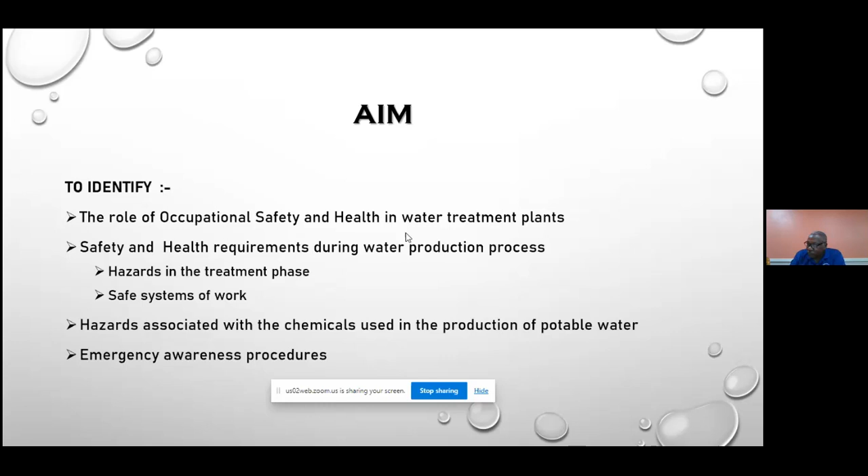The aim of today's discussion is to identify the following: the role of occupational safety and health in water treatment plants, health and safety in the production of potable water, and in that we'll deal with the hazards in the treatment and some safe systems of work, chemicals in the production of potable water, and emergency awareness procedures. The objective is for all of us to understand the importance of safety in the water treatment and how it can impact on us and the people around us.

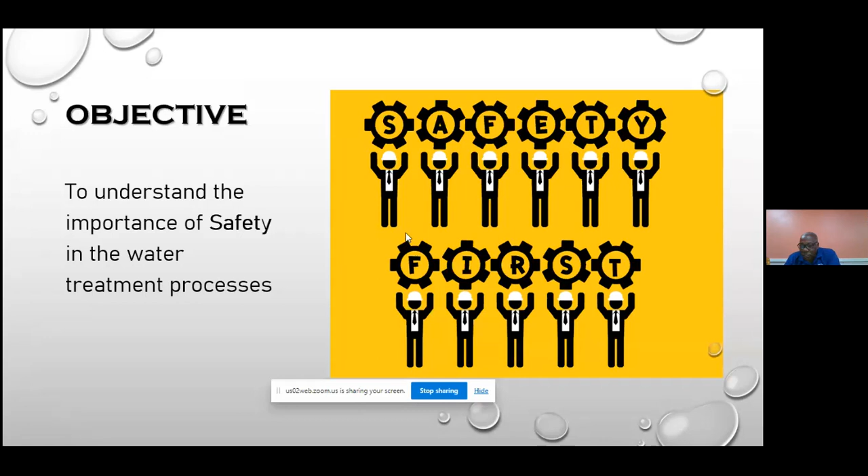Let me do some general introduction. Let me say something about myself. I am Junior Frank. I am Tobagonian by birth, Trinidadian by boat. That makes me a Trinbagonian. I've been employed in the water industry for the last 40 years and in the health and safety department for about 20 of those years. The last 10 years I've been in the management of the health and safety department at the Water and Sewerage Authority in Trinidad and Tobago. Presently, I operate as the manager of health and safety. I may look good to you, and young to you, but I've torn plenty calendars.

So let's get right into the meat of this afternoon's business. Occupational health and safety in the workplace. What is occupational health and safety in the workplace? It is described as a multidisciplinary field concerned with the safety, health, and welfare of people at work. It saves lives and it reduces expenditure from accidents and incidents and other things that may happen from unsafe acts in the workplace. The main purpose of workplace safety is to protect workers from the various hazards that are present in performing one's daily tasks and operations.

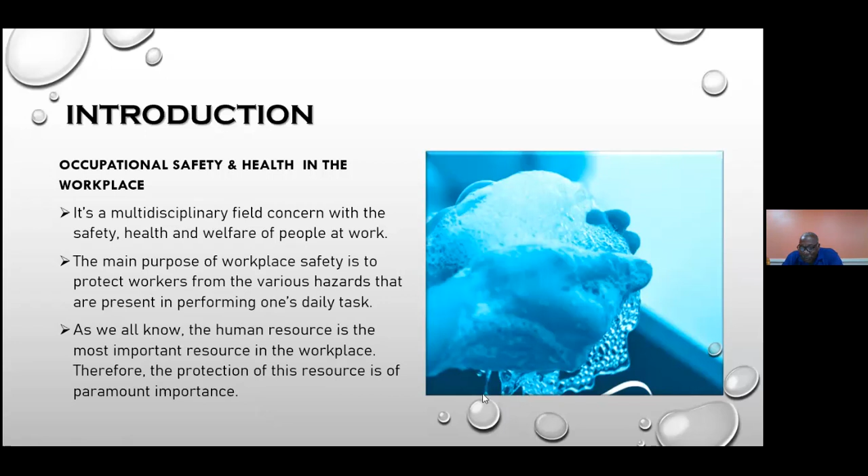I want to talk a little about the COVID-19 pandemic. COVID-19 is real. It's a real dangerous situation. I could talk about Trinidad and Tobago. The numbers were extremely high today of new cases and I think deaths. So it is important that we protect ourselves at all times.

Social distancing, wearing of face covering, washing and cleaning of our hands and the other protocols that comes with COVID-19. Water for ablutionary purposes, such as washing of hands, cleaning, sanitizing, etc., are essential part in preventing and protecting human health during this current COVID-19 pandemic.

Therefore, it's extremely important to have a continuous supply of potable water available for proper hygiene, as this serves as a barrier to human transmission of this COVID-19 pandemic.

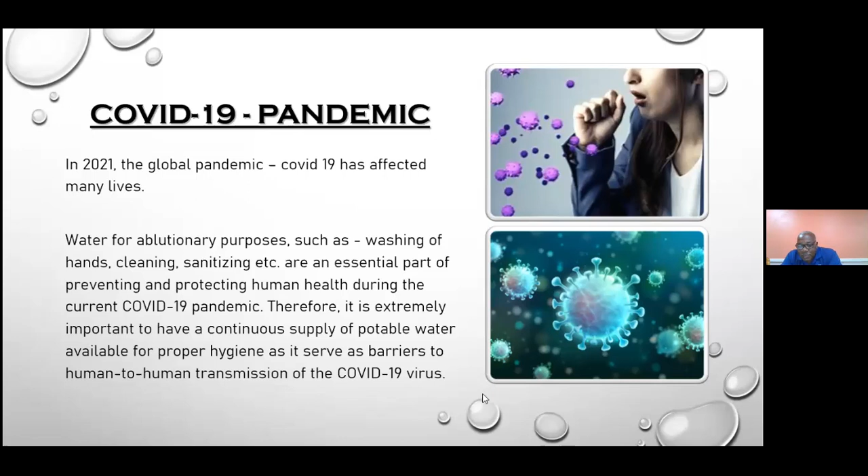I will switch now to the role of occupational health and safety in the workplace. Occupational health and safety in the workplace is basically a three-prong approach. It's legal, it's moral, and financial.

Financial: the causes of accidents and injury in the workplace are extremely expensive. Being the manager of health and safety, I review lots of workplace accidents, and they are very, very expensive. When we look at our workplace accidents, we really don't get the total cost of them. I've seen accidents that appear fairly simple and minor cost millions of dollars. In safety, we say it's not what it would cost us in the beginning, but what will be the final savings when we have proper health and safety procedures in the workplace.

The moral part of occupational health and safety is the expectation of good standards of health and safety. When you come to work, you're expected to work in a safe environment, free from harm and risk, so that you will avoid injury in the workplace. We need you to come back to work tomorrow. And if you are injured and cannot come back, it's costly to replace you. There's no cost in replacing a life. So it's important that the moral aspect of health and safety be taken seriously.

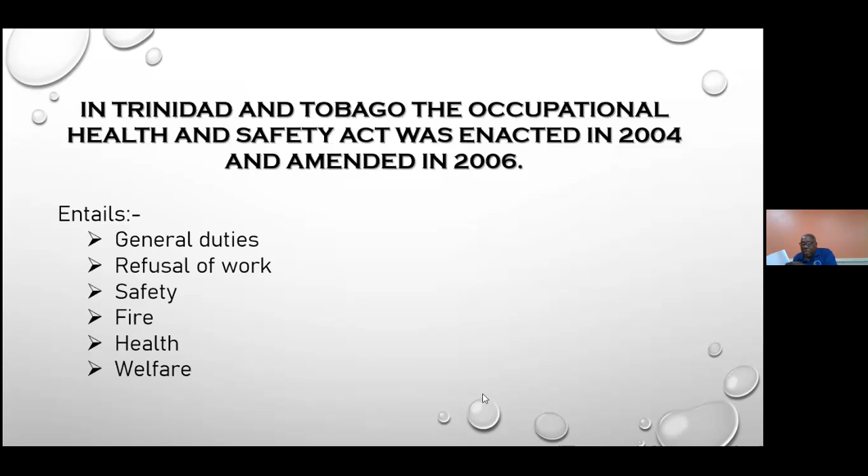We'll go into a little more detail about these parts. The general duties: each employer has general duties, and part of those general duties is ensuring the health, safety, and welfare of all employees at work. The employer must provide a good plan, and provide and maintain safe plant and safe systems of work that are reasonable and practical for safe work without risk to health.

It's also the duty to obtain and or prepare unexpired, prescribed safety data sheets to deal with all the hazardous chemicals present at the workplace. The employer is also duty bound to determine the risk in the workplace and come up with a risk assessment so that employees would be working in a safer environment.

Safety: the employer is duty bound to provide protective clothing and devices of an approved standard with instructions. The employer cannot just give you a new piece of equipment to work with; he's supposed to provide the training and instruction so that you work safely. Ensure adequate ventilation by natural or artificial means, the removal of dust and other impurities, and have safe systems for confined space entry.

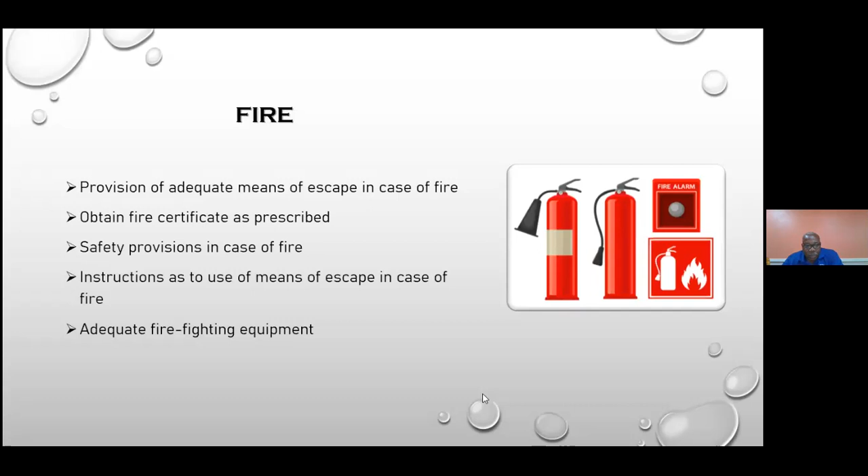Under the section that deals with fire, the employer is duty bound to provide adequate means of escape from a fire. So your emergency escape must be of good standing, must obtain a fire certificate from the prescribed authority, instruction as to the use and maintenance of means for escaping fire, and adequate firefighting equipment in the workplace, be it a fire extinguisher or a hose reel. It must be up to date and the employees must be able to use it.

Another section that deals with health in the Act talks about cleanliness, the need for respiratory protection, adequate lighting, and the prevention of glare.

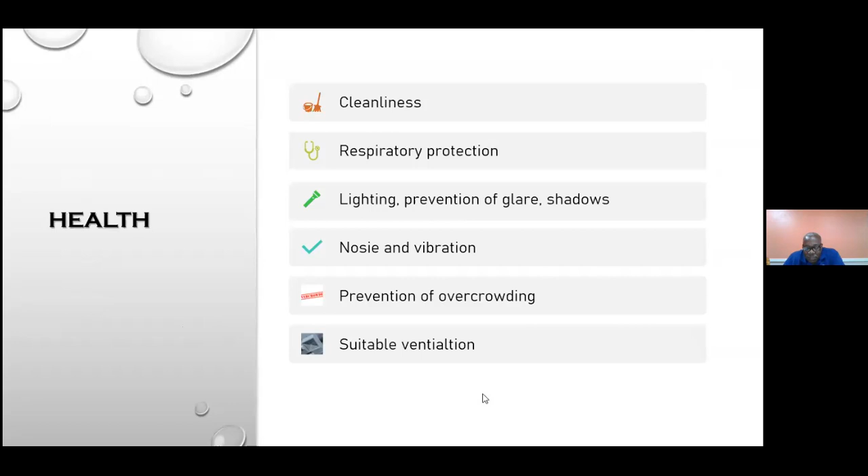Noise and vibration must be not an issue. There mustn't be overcrowding in the workplace. The Act says that each employee should have 11.5 cubic meters of space and also suitable ventilation.

Welfare: the employer is supposed to provide welfare, first aid kits, first aid boxes or cupboard under the control of a trained first aider. It also says every factory shall make effective arrangements to provide and maintain suitable points conveniently situated for all persons employed to have a cool supply of drinking water. We must provide proper drinking water, a cool supply, not necessarily a cold supply. There must also be proper places for washing, urinals and other sources, and they must not be contaminated.

I've also talked about the fines and penalties. Fine range is up to $100,000, and the imprisonment could be up to 3 years. The Act says where there's no specific penalty, it could be provided up to $20,000. Talking about the range of fines, a prominent union leader was charged recently for deploying a fire alarm system when there was no fire in the workplace.

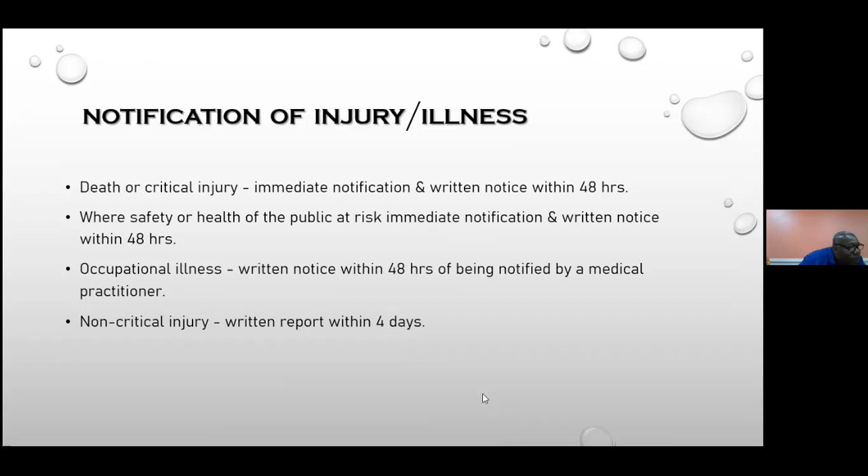To know about the safety for water treatment, we must know about the process of water treatment and how we interact with the process. It is said that the core function of a water treatment plant is to provide potable water. And as we know, potable water is water that has been treated to an international standard that is fit for human consumption.

Basically, we will look at the WHO standards. Also, water must be palatable, aesthetically pleasing to be acceptable for drinking. You wouldn't want to see some discolored water and have a drink of it. So the water must have no color - water is colorless.

Water treatment is the process involving different types of operations: physical, chemical, physicochemical, and biological. The aim is to eliminate and/or reduce contamination or non-desirable characteristics in the water.

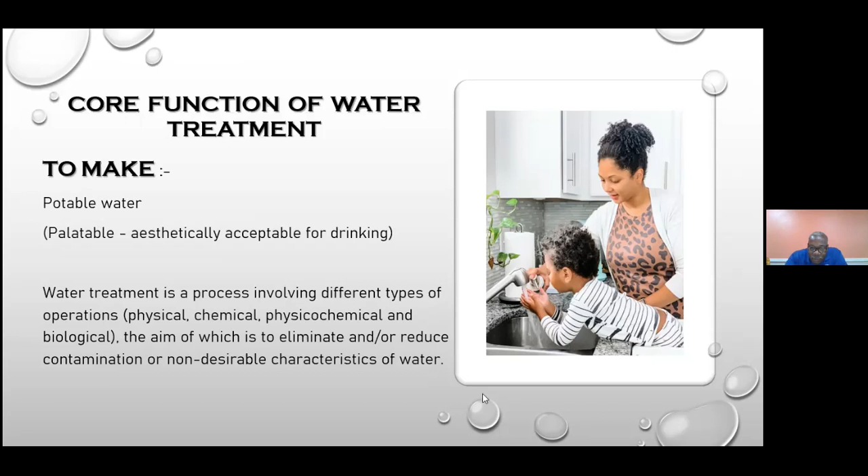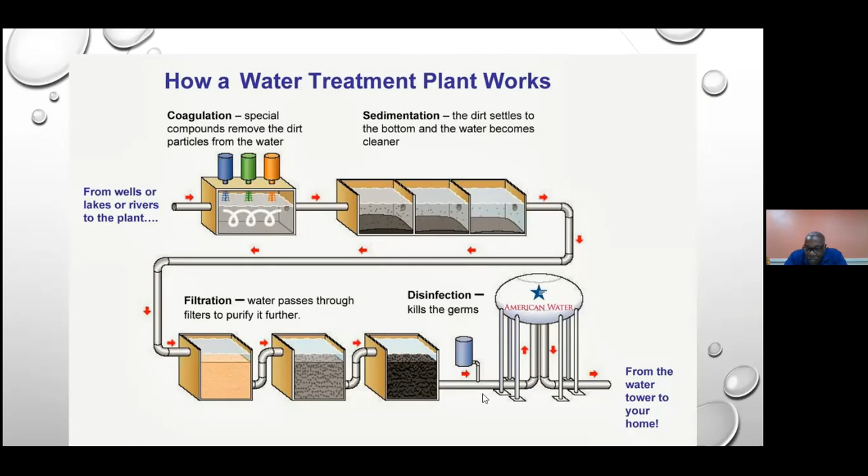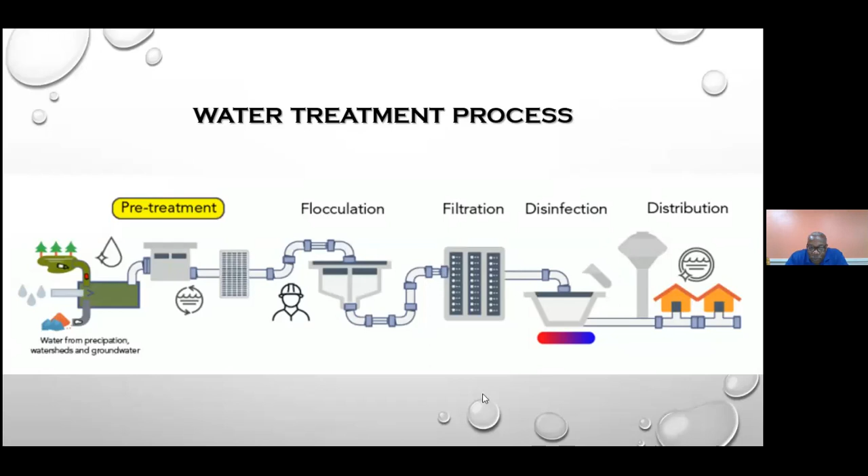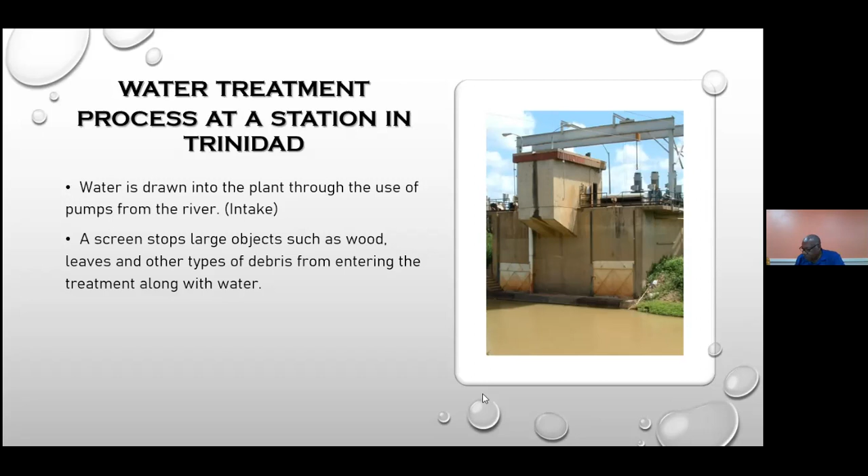Now we're going to discuss some of the treatment process at one of the stations in Trinidad. Water is drawn into the plant through the use of pumps from the river as the intake. Screens stop large objects such as wood, leaves, and other types of debris from entering into the treatment process. As you can see, these are some of the screens that stop the debris from entering into the treatment process.

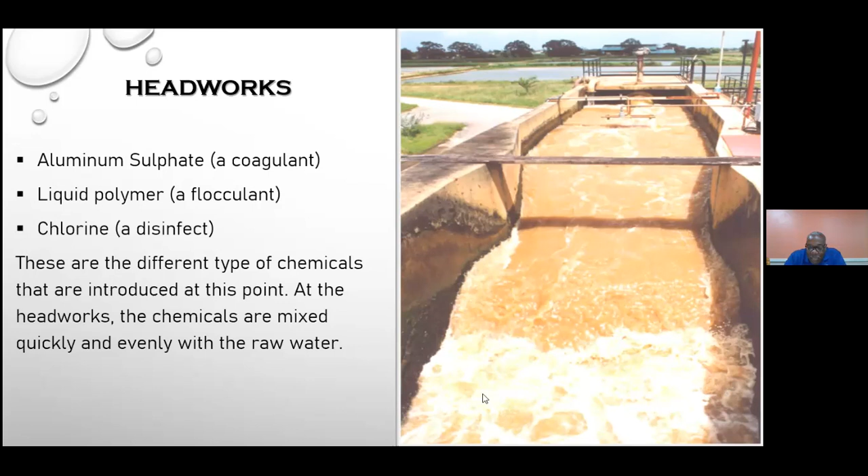Then in the water, the next step is aluminum sulfate, polymer, and chlorine. Different types of chemicals are added to the water at what we call the headworks. These chemicals, when introduced at this point, are mixed quickly and evenly with the raw water.

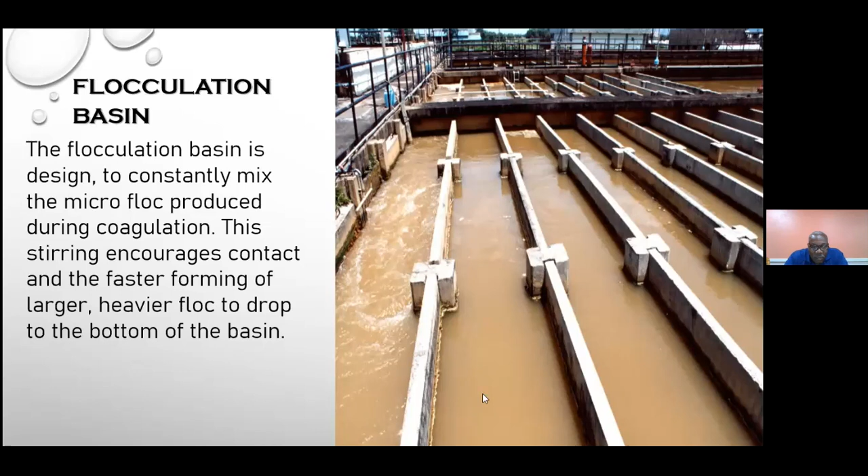Then the water goes to the flocculation basin. At this part of the plant, it is designed to mix the chemicals with the water, producing floc. The cleaner or clearer water is sent to the next stage, and the heavier floc drops to the bottom of the basin. The next stage is sedimentation, where solids are removed from the water by gravity settling. The thick floc settles to the bottom of the basin, where it is referred to as sludge. This sludge is channeled to the sludge lagoon, where it is settled further.

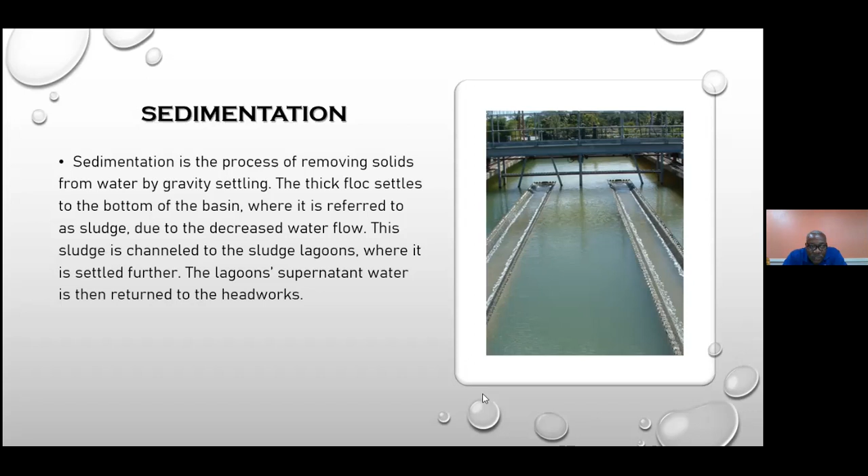The waste from the lagoon is returned to the headworks, so much of the water is not really wasted, of the raw water. Then there's the filtration process.

After the sedimentation, the water is filtered from the sedimentation basin. This helps remove any fine or suspended matter, as well as any floc carryover that remains after the coagulation and sedimentation process.

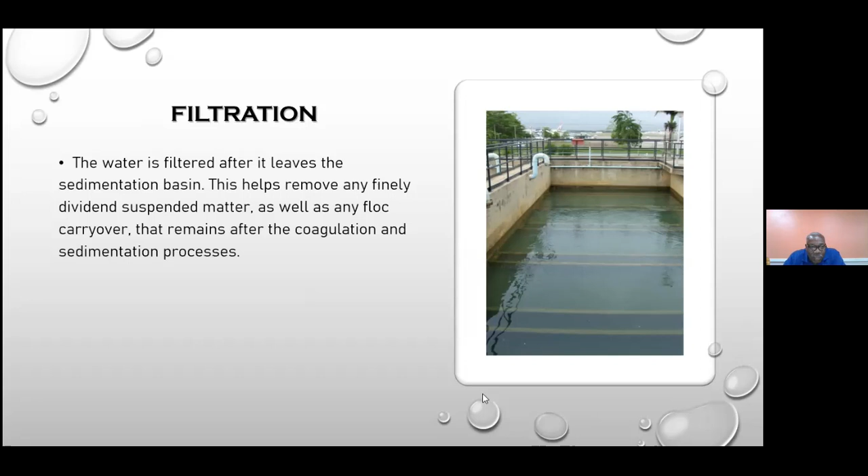The final stage is basically disinfection, where chlorine is applied to the water to kill any bacteria or viruses. Generally, gaseous chlorine is applied at between 2.5 to about 5 parts per million.

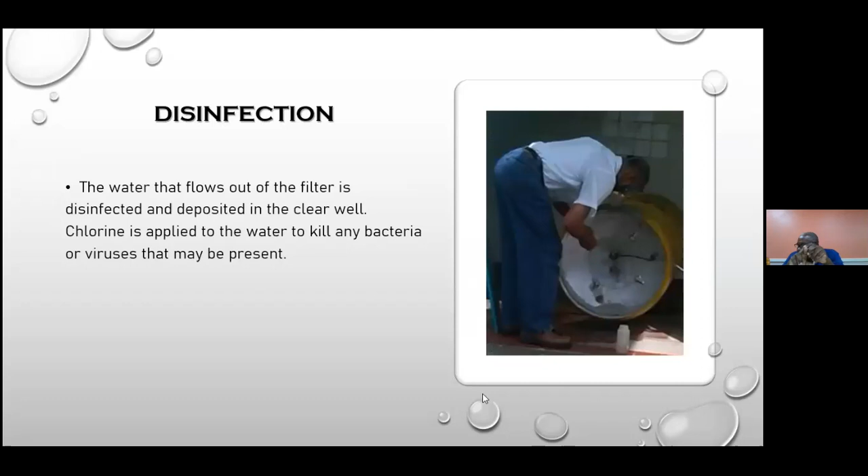We'll discuss some of the workplace chemicals used in the treatment of water. We have chlorine, which could be gaseous, liquid, or granular. There's aluminum sulfate, which we generally call alum. There is lime, carbon, polymer, and a whole range of different chemicals based on the treatment process.

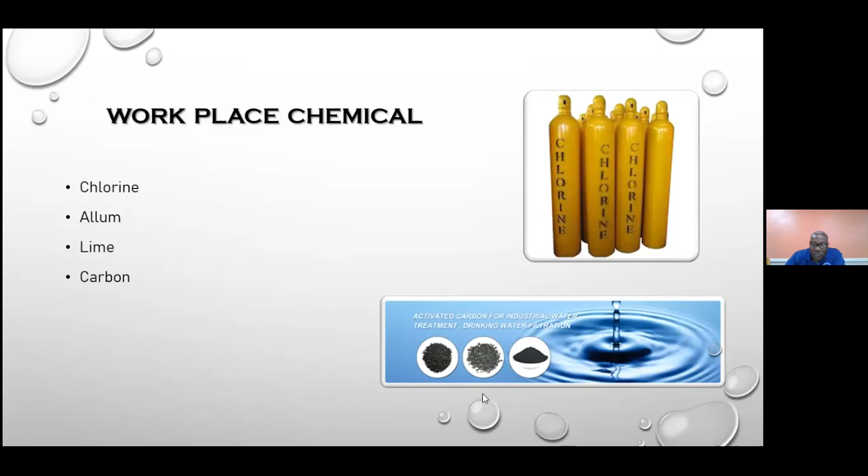To effectively and safely deal with chemicals, we must know what we are doing. There's a document called the SDS or MSDS, the Safety Data Sheet or Material Safety Data Sheet. This is a document that lists information relating to occupational safety and health for the use of chemical substances and products.

The safety data sheets are widely used systems for classification of information on chemical compounds and chemical mixtures. The SDS information will include instructions for the safe use and potential hazards associated with a particular material or product, along with spill handling procedures. A safety data sheet for a substance is not primarily intended for general consumers, but focuses instead on the hazards of working with the material in an occupational setting.

There's also a duty to properly label substances found in the workplace.

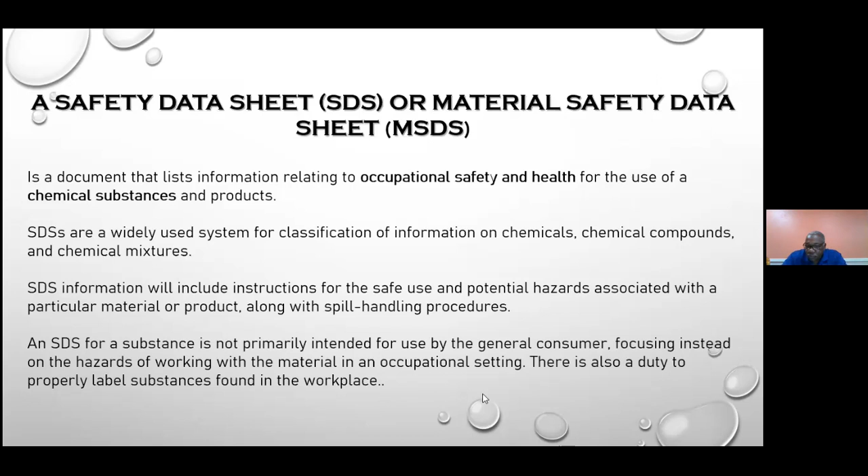The picture we see here is a material safety data sheet or safety data sheet for chlorine gas. It basically has about 16 sections. The first section talks about the identification of the chemical as well as its recommended uses. The second section talks about the hazards.

The hazard classification of the chemical - is it flammable, liquid, etc. There's a pictogram section that will tell you about the dangers of the chemical. If you see a skull and crossbones, we know that it will kill you.

Section 3 talks about the substance and its mixtures. This section identifies the ingredients contained in the product indicated by the safety data sheet, including impurities and what to do to stabilize the chemical.

Section 4 speaks about the first aid measures, what to do if you're exposed to the chemical. Section 5 covers firefighting methods. Section 6 talks about accidental release.

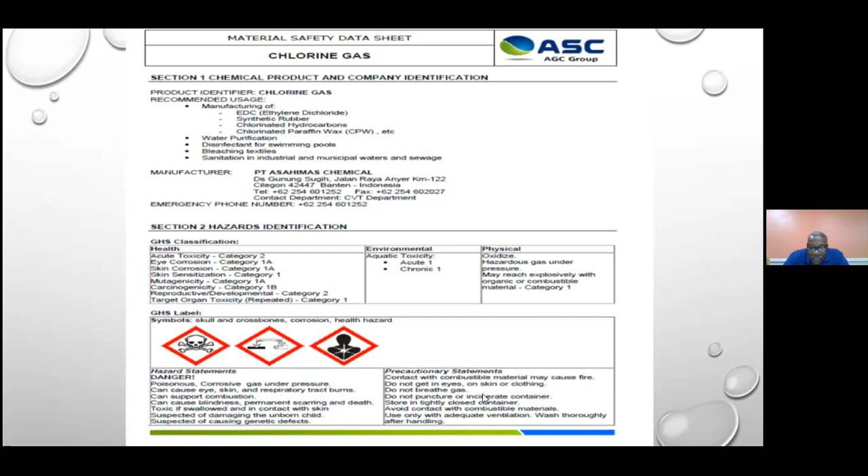It is important to have a safety data sheet or material safety data sheet in the event that someone is exposed to the chemical. When we take that to a medical institution, it will give the medical practitioners much needed information about the chemical that the person was exposed to.

There are several accidents and incidents in the water treatment process. There's chlorine spills, manual handling accidents and incidents, falls from heights, etc. There was this accident at a treatment plant in Tobago where an employee fell off a ladder.

It cost the organization about $300,000 and counting. And then the organization was taken to court by the authorities for not providing safe systems of work for that employee.

In the workplace, there are several hazards. We consider a hazard to be a potential source of harm or adverse health effects on a person or persons. The terms hazard and risk are generally interchanged.

I will provide you an example so that you'll know the difference between a risk and a hazard. If there's a leak and resulting water on the floor, on the ground, this could cause a slipping and tripping hazard to persons who are traversing the area. But if the area was physically barricaded, so it would be difficult for someone to access that area, the hazard will be present, but the risk will be decreased.

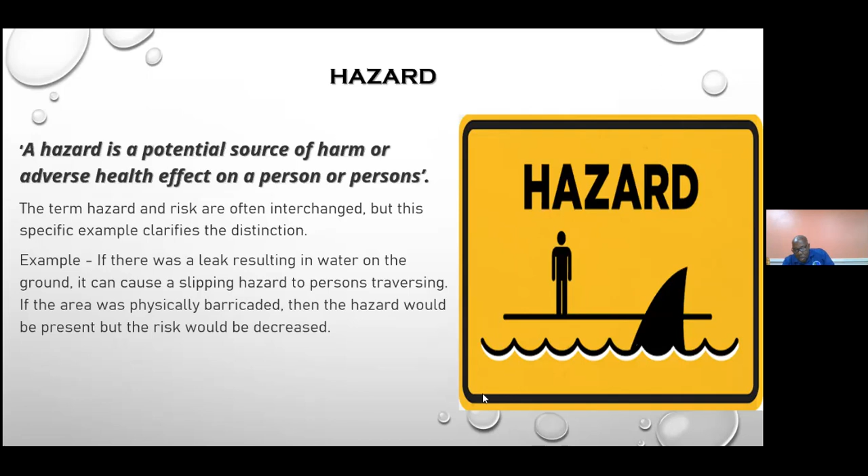In our workspace, there are several physical hazards. Noise above 85 decibels will affect your hearing, and if you're in that environment for over an 8-hour period, it could permanently affect your hearing.

There's also moving machine accidents, like a forklift in your area. There's slipping and tripping from poor housekeeping, for example if water or some liquid is spilled. Most of the pumps produce heat, and if we get close to these devices, we could be burned. Unfortunately, sometimes there are projectiles that we may be struck with. These are some of the physical hazards in the workplace.

We also have mechanical and accidental hazards: fall from height, as I said, the guy who fell off the ladder; contact with machinery, struck by moving parts; caught between rotation, the shaft and a pump and motor spinning extremely fast, where clothing or other parts could be caught and cause serious accidents; and there's also the issue of walking around or over a body of water.

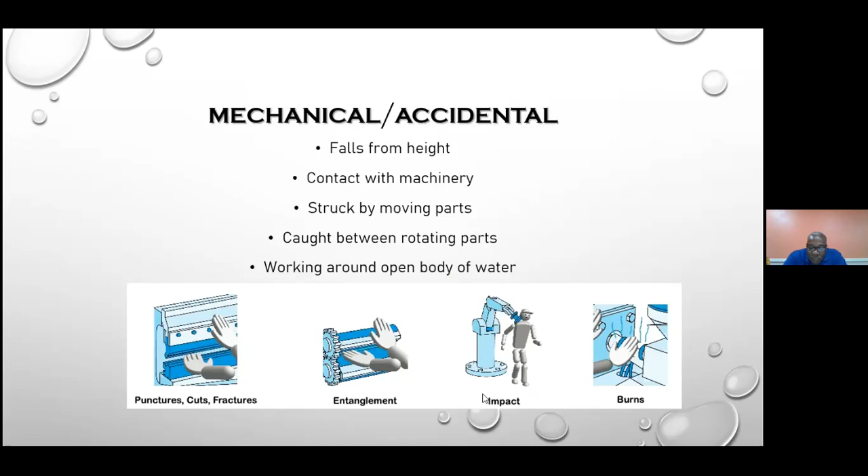These are things that could cause mechanical or accidental hazards.

Also in the workplace, we have biological hazards, where people may get in contact with raw water sludge or the untreated raw water. The operator could be attacked by wildlife. In Trinidad, there are some deadly snakes, in some of the streams we have caimans, and I've seen accidents where bees and wasps attack people in the workplace.

There's also bacteria and viruses, where pigeon, bat, and rat droppings could affect you in the workplace. There's also ergonomic hazards.

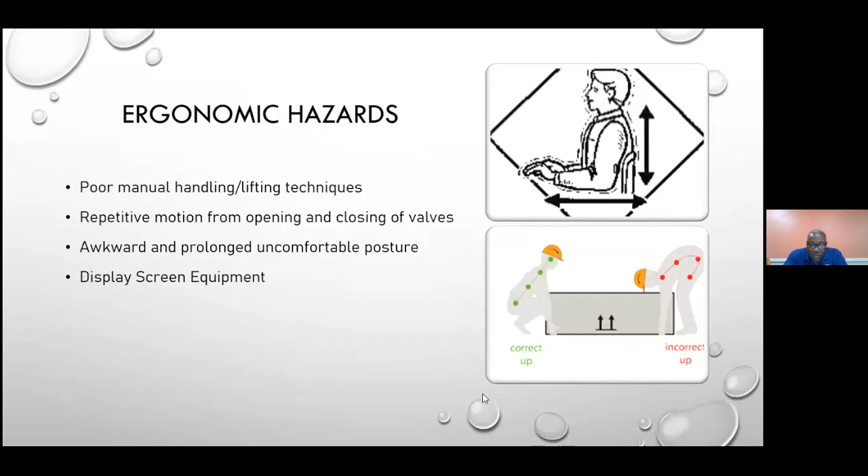Poor manual handling techniques, poor lifting techniques, where you try to lift with your back and not with your legs. Where there's repetitive motion, we may have to do the same thing over and over again, and that could put strain on our lower back or body. Awkward and prolonged uncomfortable posture, based on the design of the plant, we may be working in an uncomfortable situation, looking at a computer or display screen equipment -- these are some of the ergonomic hazards we are exposed to.

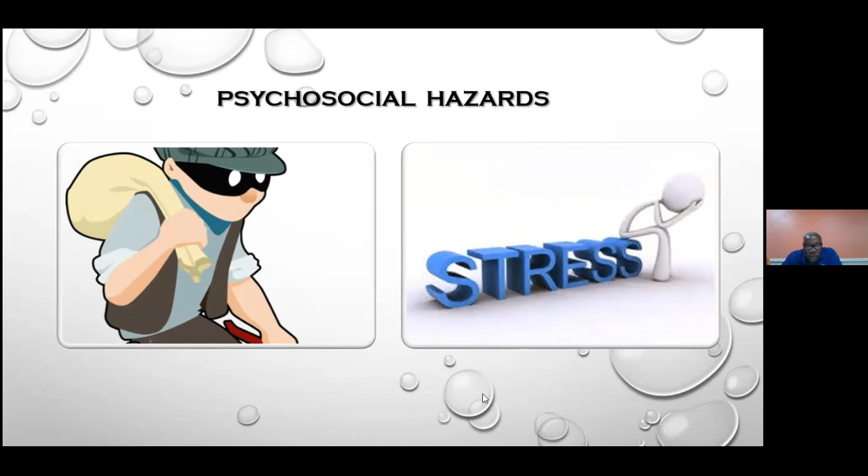And there's also psychosocial hazards, where stress in the workplace, trying to finish something in too short a time. There could be violence. Noise could also be a psychosocial problem, and criminal activities -- we have seen that some of the gangs these days are stealing scrap iron and metal from the plants. These could be psychosocial hazards that we have to deal with in the workplace.

But to overcome these hazards, risks, and unsafe activities, there are safe systems of work which, if adhered to, could save the day for us. So basically, we could have risk assessment, job safety analysis, permit to work, toolbox meetings, safety data sheets, the hierarchy of control, emergency response plan, training, inspection, etc.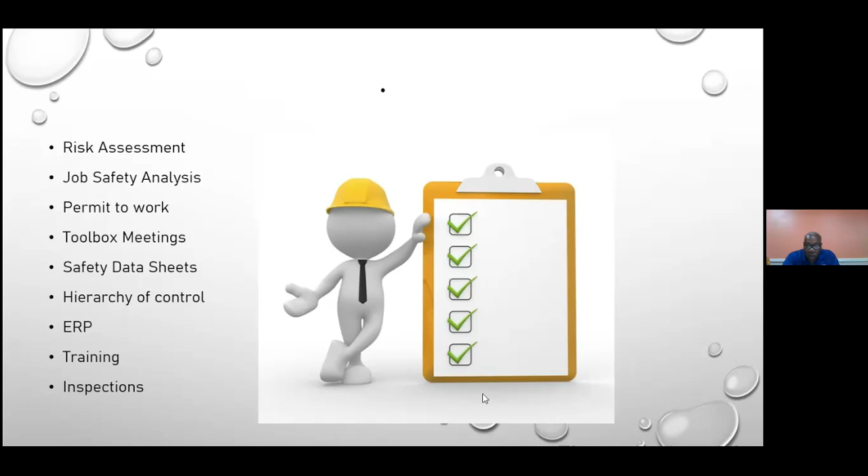The first safe system of work we want to talk about is the risk assessment and job safety analysis. A risk assessment is a broad-based assessment of a task, identifying and analyzing the events that may affect the operation.

How do we control the measure? By daily housekeeping, by cleaning up spills, by the use of proper PPE. Then we'll have a risk assessment with a justification for the risk ratings, and we could add additional controls to lessen the risk at the end of the day.

Job safety analysis, on the other hand, is when we break down the job into smaller parts, identifying safety components for each part. If we have to change a tire, we could break down that whole operation into several different parts.

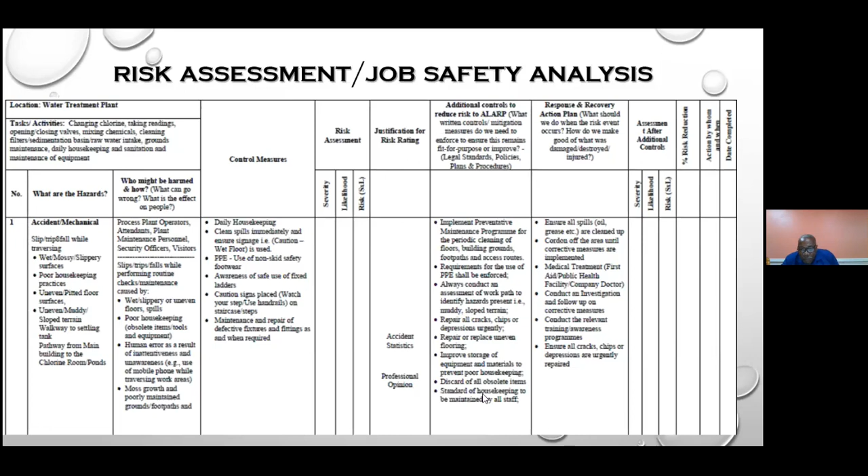Permit to work is another safe system of work. A permit to work is a management system used to ensure work is done safely and effectively, and to make high-risk tasks safely, all right? In the workplace, in my operations, we have...

4 types of permits. We use a general permit that is used for all jobs. If we have to do confined space work, you must have a general permit and a confined space permit. If we have to do hot work, any work that emits heat, we'll have to have a general permit and a hot work permit. And all electrical work needs an electrical permit also.

So it's possible that you could have all the permits in one operation. You could have a general permit working in a confined space because you have to do some welding in that confined space, so we need a hot permit there. And we also need to do some electrical work because the electrician may have to provide artificial lighting. So we could use all the permits in one operation.

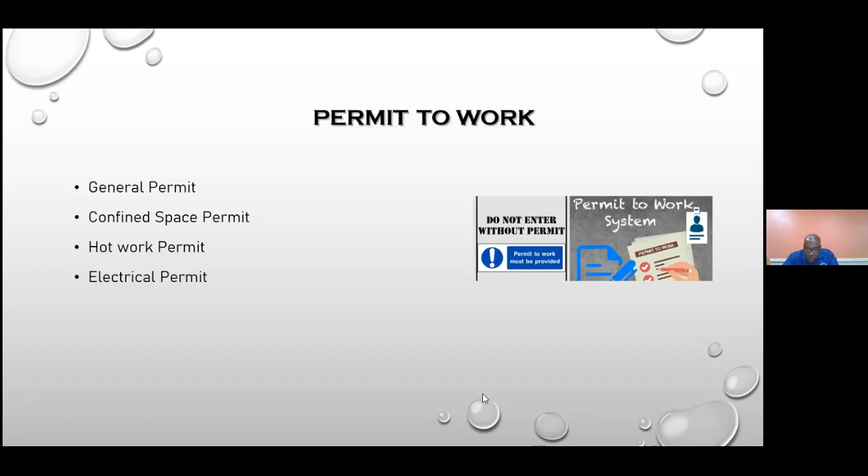Toolbox Talk, or some people call it safety talk. It's basically a short safety chat, some people say about 5 to 15 minutes before the job starts about the execution of the job. All right, we could basically talk on any topic. By the end of the day, it should relate to how we will safely execute the job.

So if we are changing chlorine, the toolbox talk might be about PPE, about personal protective equipment, and changing chlorine.

The safety data sheet, we spoke about that earlier, so I wouldn't really go through that again. And the other safe system of work I want to talk about is the hierarchy of control.

The hierarchy of control is a system for controlling risk in the workplace by ranking the risk from the highest to the lowest. So when we look at the risk, we could try to eliminate it if it's possible. If that's not possible, we'll do a substitution. If that also is not possible, we could try to isolate the risk.

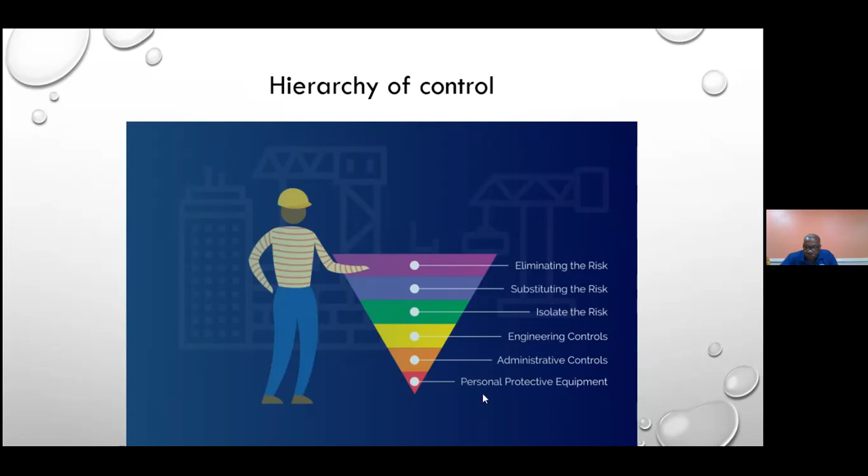After we eliminate some of the hazards, or we know how to control the hazards, things could still happen. So we must know how to deal with an emergency when an emergency happens. We're supposed to have an emergency evacuation plan for fire, how to evacuate the building.

This emergency evacuation for fire will give general direction on how to meet at a designated evacuation location. It starts with somebody pulling the alarm, calling the fire authorities. We use a fire extinguisher if possible. We go to the muster point and have a head count.

We could also have an emergency response plan for severe weather. If our station is in a flood-prone zone, we will have to design an emergency response plan for when that situation happens.

Also for emergency services and violence. Also, in this day of COVID and COVID-19, we need to have a plan in the event that someone falls ill or shows signs that they may have been exposed to the virus.

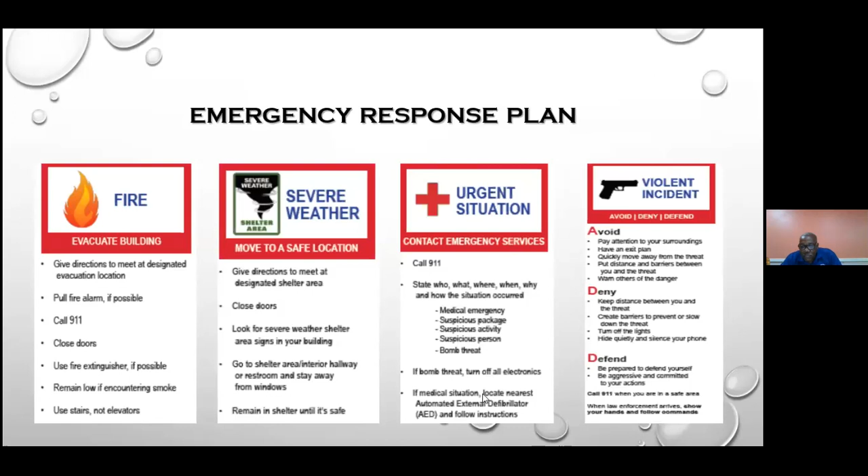I was taught that safety is everybody's business. It really starts with the man in the mirror - and that is you. So thank you for being in this session, and I am here looking to answer any questions you may have or clear up any misconceptions that may have come up during the presentation.